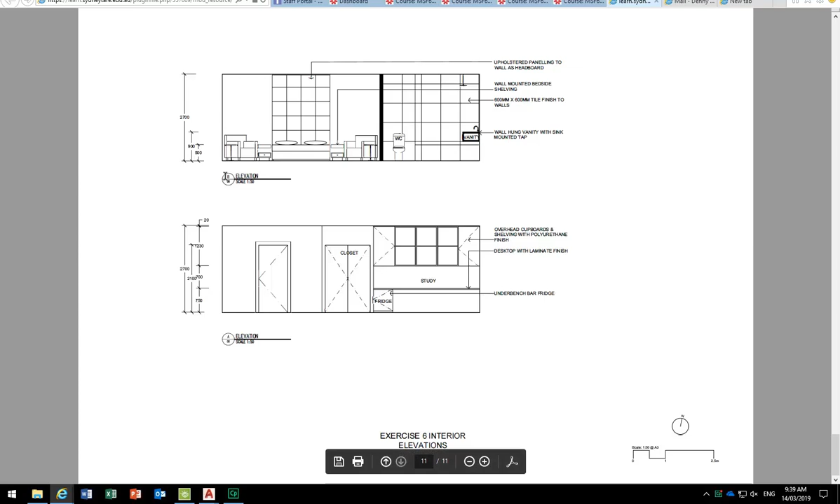Desk making noise, but anyhow, I'll start setting up my internal elevations now. I'm just bringing up a drawing of those, which I'm really not going to have to come back to, hopefully, because I can get most of the things I need as long as I know the height of the room.

And then maybe this 900, I think that's... I don't know what that's actually dimensioning, because it's obviously not dimensioning the chairs, so I don't really know if that's even useful. Maybe it's the vanity and it's just on the wrong side.

But I'm going to show you as well how you can get these heights by measuring afterwards, because you don't want to sit down and guess these measurements for all the different parts of the chairs. But actually, before I show you those steps, if you want to start working on those things, just print the drawing out and scale off to get the heights, and that'll be good enough, because if you don't have a perfect measurement for the top of your chair—the height from the floor to the top—it doesn't really matter, because you're not designing the chair.

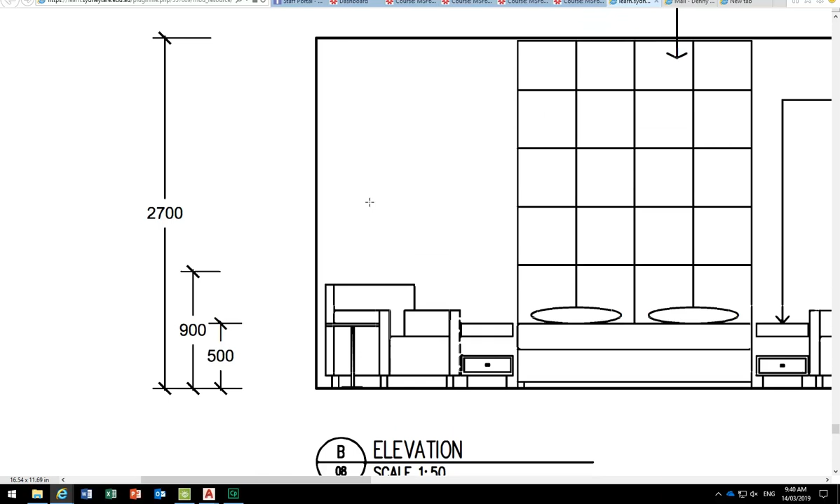It's going to be supplied as-is from the furniture makers, so if the height isn't perfect, that's not such a problem. But what we need accurate measurements for are the things you're designing, and that's going to be the height of the room, and things like vanities and other things that you're creating and designing as part of your fit out. So I'll start with those.

So again, looking at this floor plan, I'll just quickly go back and double check that height. It was 2700, wasn't it? Yeah, okay. So we want to project to the left, but I don't want to be drawing that way.

So I'm going to rotate the whole view, or the workspace, using this icon that comes up only when you move your cursor over that view cube in the compass. Once you move your cursor there, you're going to get these curved buttons. And actually, I always forget—do you want me to take your screen over so you can see this close up? Yep, so I'll do that.

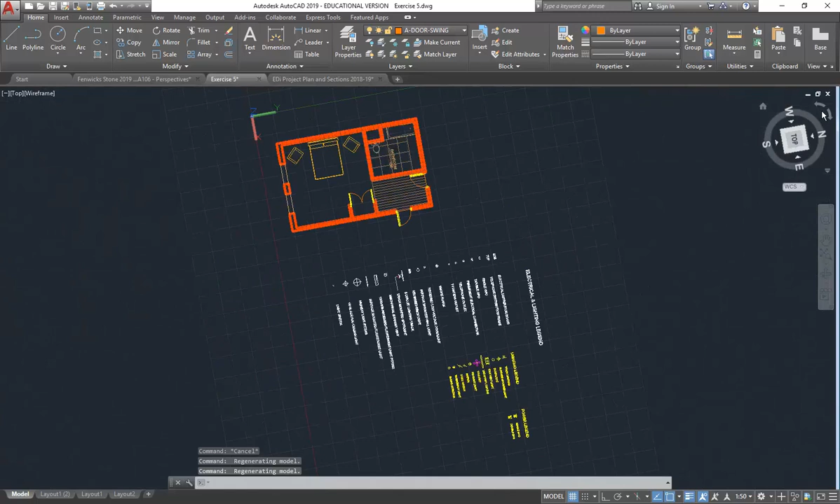Okay, so it's an easy one to miss, because it's not there until you move your cursor into that spot. But once you do, you're going to see those curving arrow buttons. I always think these are back to front, which is why I'll often do it the wrong way. But in this case, it should be the bottom right arrow that I'm picking to rotate it that way—I suppose it is the right way, maybe I'm just thinking of it wrong. Yeah, so you can see there you can easily rotate it back and forth. And so this is the way we want it.

Then I'm going to draw a line so I know where I'm projecting. If you look at that internal elevation, you can tell it's obviously cutting through the bathroom, and probably not cutting through the windows, though it's hard to tell with an internal elevation—but we'll assume it's not cutting through the windows. It's also probably in front of the bed, but it doesn't matter if we draw the line through the bed; we can just draw the bed as though it's not being cut.

Okay, so I'm going to draw a line, and I might just change to one of my layers—I don't have an annotation layer, so I'm going to make one, just a general one for now, and set it to be white. For some of the annotation I've been using 0.25, which is good for text, but otherwise annotation 0.18. And I'll make that the current layer.

Then I'm going to draw my line so I know where I'm projecting and where I'm cutting through my space. Again, not through the windows, so I'm going to go on that bit of wall between the windows. You can do it on the midpoint or even just to one side, it doesn't really matter.

And there I'm trying to get under the bed. I'm going to turn ortho on so it's a straight line, and I'm going through the bathroom, of course, and then I'll be cutting the vanity and again that wall next to the bathroom.

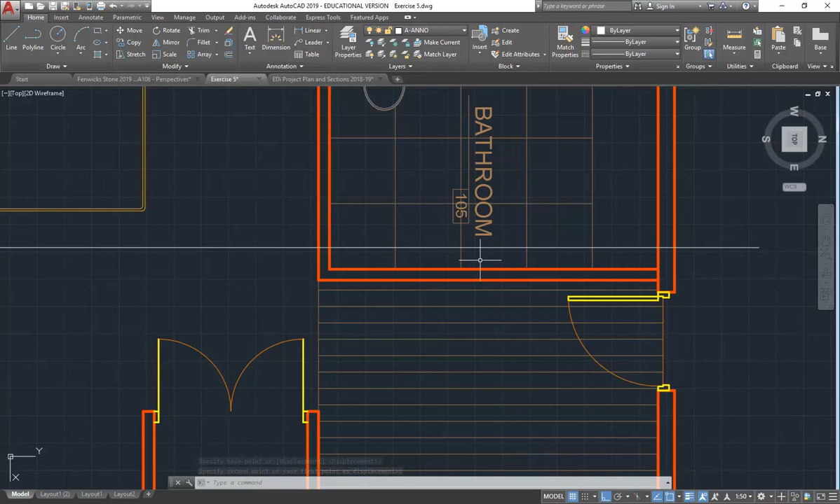Maybe it could be a little bit lower than that, but you don't want to have it too far down below the bathroom wall, and that should do. So I've still got to finish off some things in the plan—the bathroom and the door's got to be added—but I've got enough to draw that section, or the elevation.

So now we've got to get some more layers. I've got a floor layer, and I'll just show you that that floor layer has actually got a very light line weight, because that's been used not really to draw the floor as such, but to show the floor hatching or the floor material.

At this point, you'll often need to break your layers up further, and you might even need to add things to your layer names. So I'm going to change this to A-floor hatch, because now I'm going to make a new layer for the floor, and I'm going to call this one A-floor. Just keeping it consistent, with a dash.

Colours are up to you, but I'm going to make it maybe a green sort of colour because it probably would be concrete. Even though the floor lining on top obviously wouldn't be concrete, the floor structure would be concrete. And then I'm going to set the line weight.

Well, I'll check with you—what do you think the line weight should be if it's the floor being cut in the section? Thick, that's right, as thick as you can really. So this is going to be the heaviest line weight. Since I've used 0.5, which is quite heavy for my walls, I'll go with that for the floors as well.

And that's always good for internal elevations. It's really important that you have heavy lines—I mean this is just okay, but I think these drawings can definitely be improved by having a heavier line around the outside, and that makes them really read as true internal elevations when they've got that heavy line as a border.

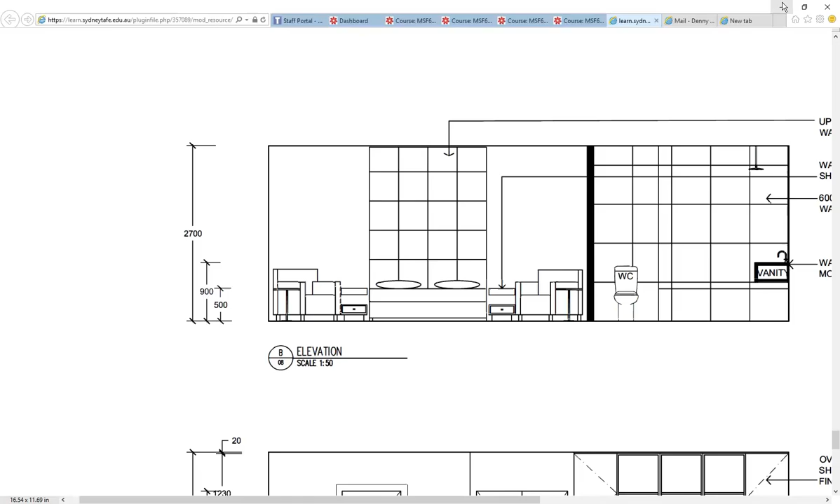So again, 0.5 is the line weight I'll use there, and then we'll also need some more layers for the walls. Oh no, sorry, I've got this layer already, A-wall projection. You'll see in a minute why we'll need that. So that's enough—I'll make my floor layer current.

Okay, so I've got to decide where my elevation's going to go. By drawing a line, I'm just going to start it somewhere up above my plan and take it across to the right. As long as it's a straight line, that's good enough for the floor. But leave a bit of distance from the plan—don't go too far, otherwise you're going to be creating work for yourself by having to zoom all the time. So again, that's up to you where you draw that line.

And so then I'll change to my—so I'll do a ceiling too, that's what I meant to do. So I'll make a layer now for my ceiling.

If it's not nominated, normally you can assume these are cut layers. But if you want to make it clear, you can always put that in the name. So you could say A floor cut.

And see the wall there. So I've got A wall projection. Then the other one is again cut, but again if it doesn't say, you can often assume that it's cut.

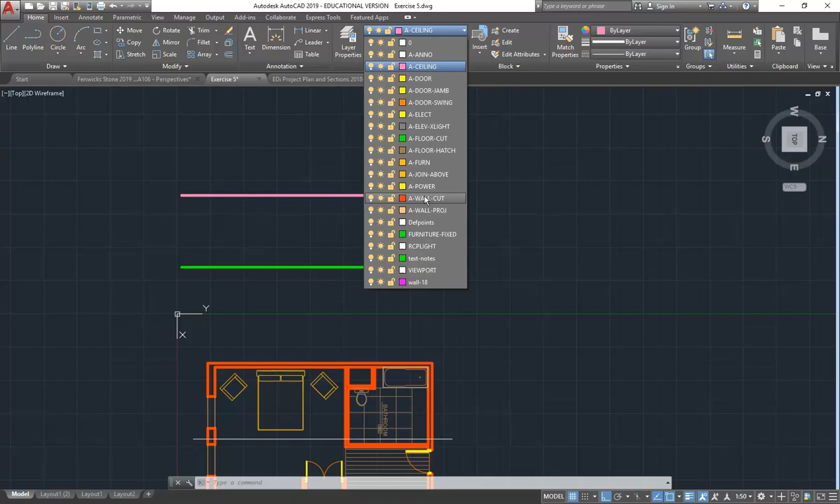So then I'll change to my wall layer, wall cut, and draw a line by projecting from the intersection of that section line I've drawn and the wall up to my ceiling, and the same on the other side.

That's the really simple ones - you see it, and then use fillet, making sure the radius is 0, and simply join those lines together. Easy. And I'll do the bottoms too.

So then I'll just draw a couple more lines for the interior walls. There's a good chance maybe just to point out a couple of commands. A lot of people like to show off that they know these commands and use them, but I don't actually find them that helpful, I'll show them anyway.

You've got these two other line drawing commands, ray and construction line. A ray gives you an infinite line, so from any point it'll just go forever until you trim it. And that can be useful.

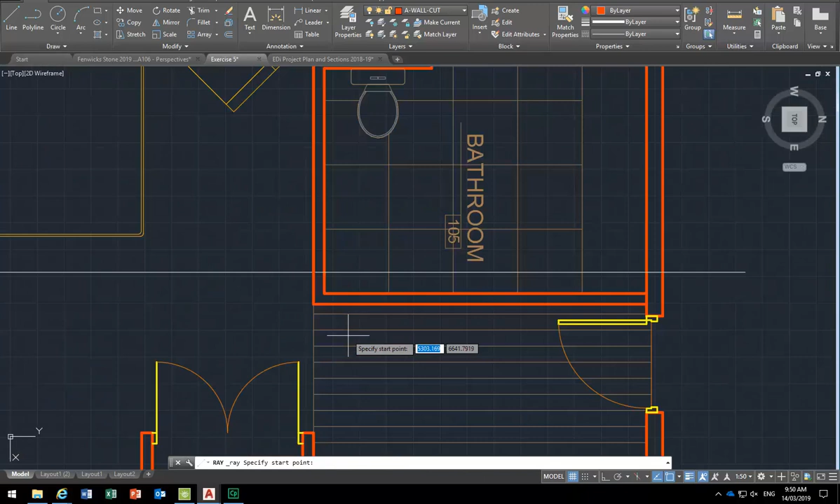So if you think about drawing from here, this is a ray, and it will just come up without me having to zoom out. If I can just have ortho on, that will go straight up to infinity, and then I can come back and trim that at the ceiling.

And once you trim a ray, then it becomes a line. So some people do that. And then the other one is construction line.

Yeah, that's right - so they go infinitely. Construction lines go infinitely in both directions. But again, when you trim them, they're lines.

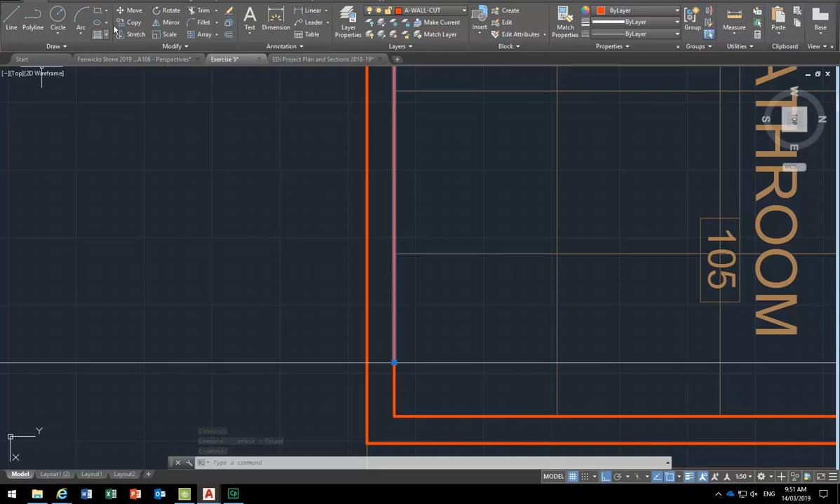It might seem like it will save you time, but what I've found over many years is that sometimes it's easier just to draw the one line, and then when you're zoomed in to all the parts where it's cutting your walls or whatever, you can just copy that line across to all the points that it's being cut.

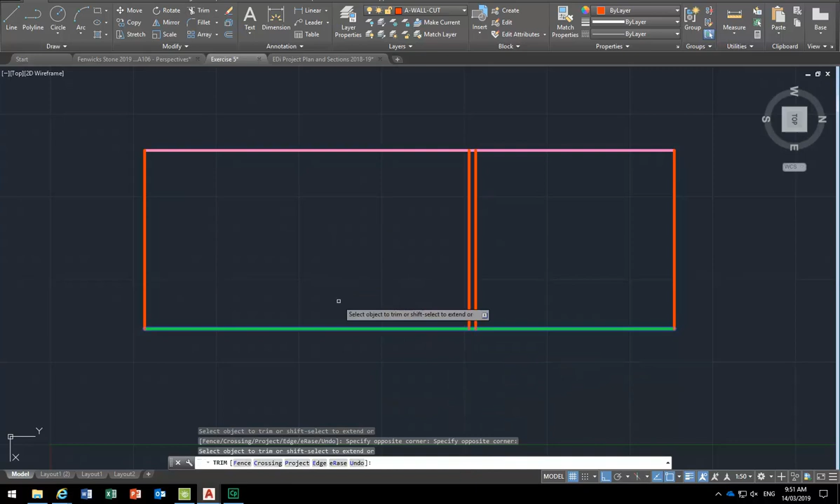So if you're doing that, you probably don't need to use rays. And you can see there, I've got the same thing and it's already trimmed. I find that to be the easiest way, and now I can just trim at the bottom. We've got the basics set out for the elevation already done.

So this is the next thing I'll show you - how to do some more detailed items, and these chairs are a pretty good example. I think you can probably all do that already, so I'll actually show you what I was going to do in the next video, but I'll just do it now because I think you'll all cope with it.

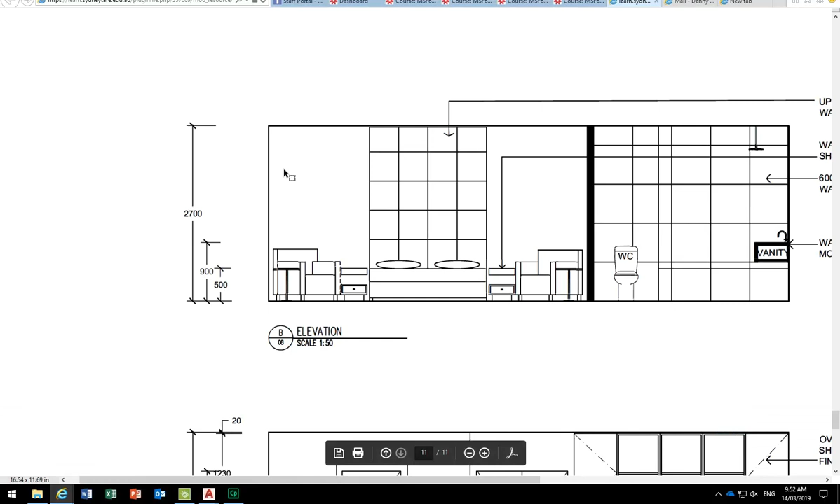How do we get the measurements for things like this chair? As I mentioned before, you can just print it out and scale off with your scale ruler. That's a really important technique - you've got to be comfortable doing that. It's something you'll need to do all the time. So that's one thing you could try.

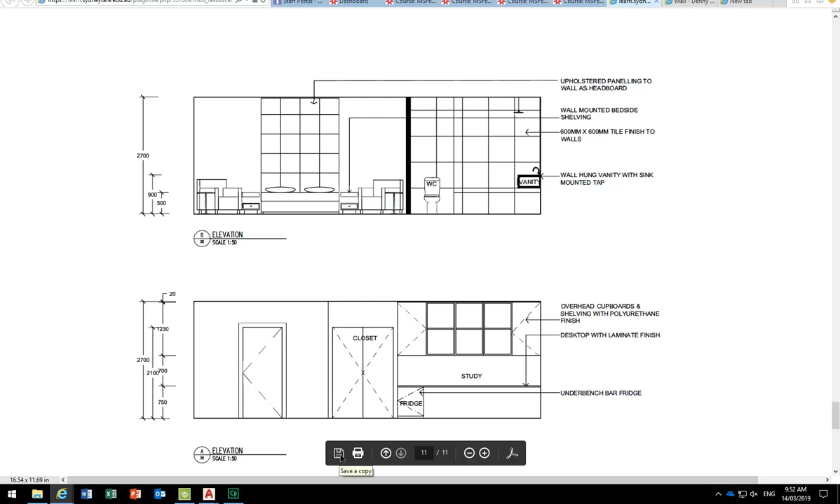But I'm going to show you something that's similar. So I'm just going to make sure I've got a copy of this, and I'm going to save it just so I can get to it quickly.

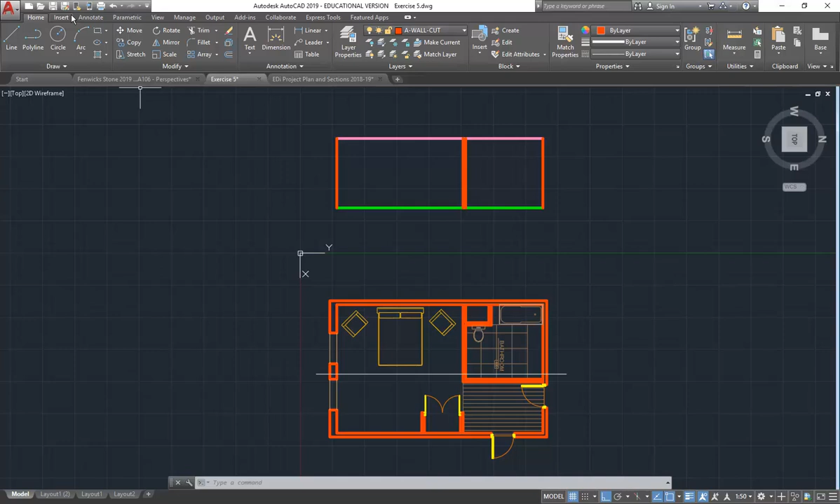Okay, so I'm going to now go and insert. Which page was it? Page 11. Okay, so I'm going to go onto the Insert tab in AutoCAD and then Attach, and then make sure, before I choose anything, down the bottom it's got to say PDF.

But apart from that, this is a brilliant thing in AutoCAD, because not many programs will let you insert PDFs. It's a proprietary thing. Adobe are really precious about their PDF format, and they don't give the rights to use it out to a lot of companies. So many programs don't have the option of inserting PDFs, but AutoCAD does.

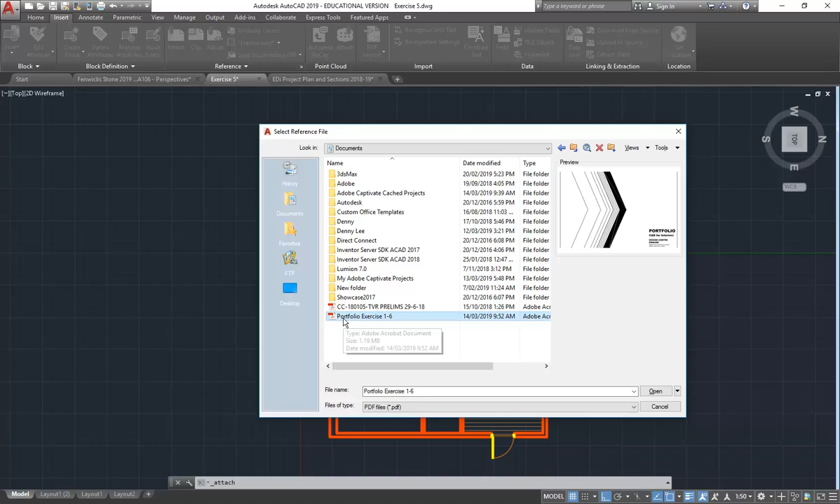So I can insert that file, that's the one I've just downloaded. And then just choose the page I want, page 11. Click OK.

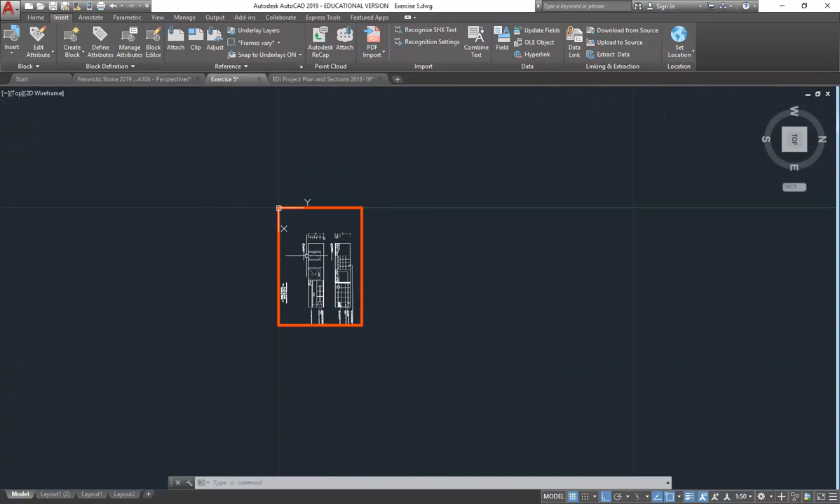And where's it gone? Oh yeah, now it's rotated, and it's also going to be tiny. Okay, but that's okay. We could have scaled it as it was being inserted, but I wanted to show you how to adjust it when you don't know the size, because you won't know what it is to begin with. So you can see there we've got a measurement.

Now also I'm going to rotate it so that it's at the same angle as what I'm drawing. So just using the regular rotate tool, I'll rotate it 90 degrees.

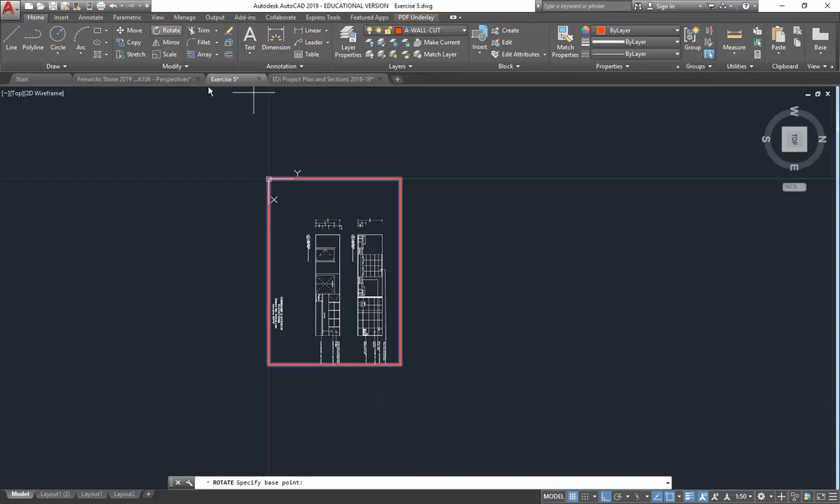But again, the key idea here is that you want to try and find a measurement and use that to scale the image to make it the right size in our AutoCAD file. If you don't have a dimension like this, you can always use a scale bar, that'll work perfectly too. Anything that has a measurement on it.

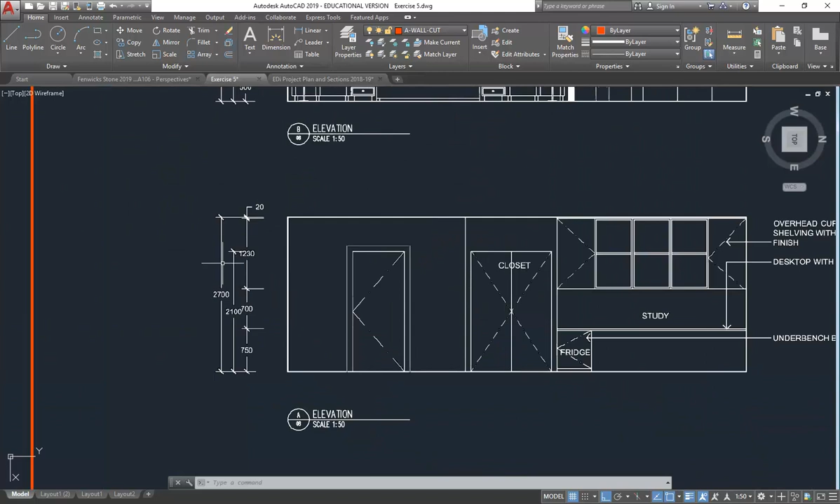So I'm going to click onto the edge of my image. It'll take us to this PDF tab. So I'm going to go back to the Home tab to get the scale command, and I'm going to choose a base point.

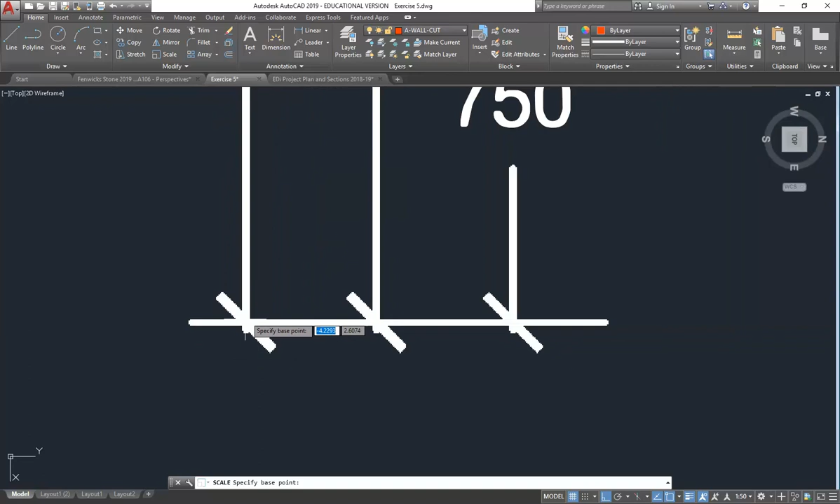So that's going to be at the bottom of that dimension. And I'm zooming right in just to be as accurate as possible. So there, notice I'm also going to the centre of the line.

And you probably all think that's normal because you probably weren't taught by the old architects and drafters that taught me how to draw by hand, and it used to always be to the side of the line in the old days. So watch out for that. I know it might seem pedantic, but it's a real thing. But if it's drawn with a computer, centre of the line is where you measure always.

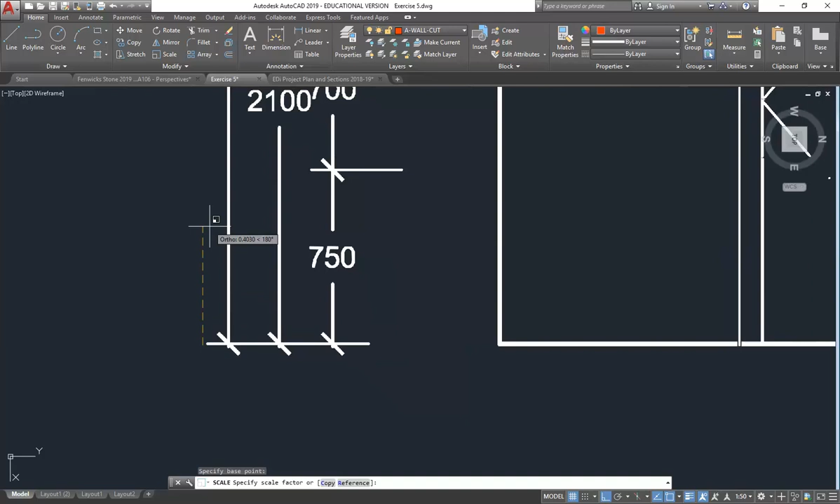So centre of the line, and then up to, then back on the command line. So that was my base point. So now I'm going to choose reference, and then get that same point.

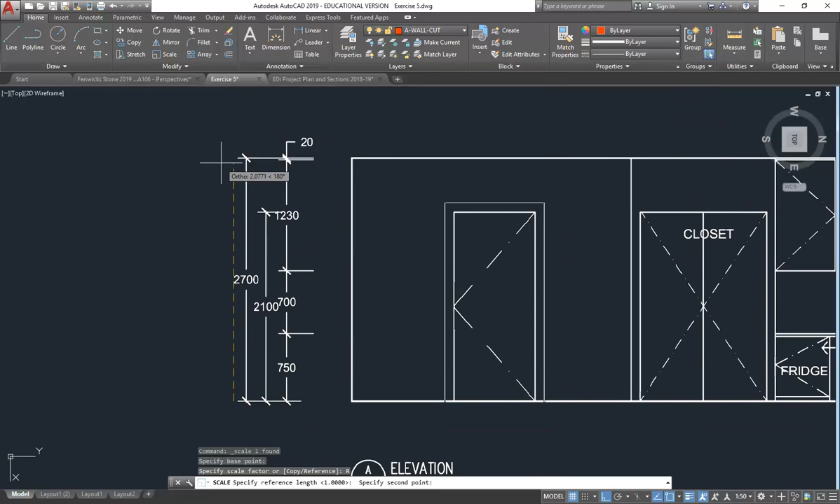Right, so that's where I'm starting to take my measurement. And it'll all make sense in a second, because then I'm going to zoom in and click onto the other end of that dimension. So I'm not worried about clicking exactly on it, I'm just making sure that I've lined up my endpoint with the centre of that dimension line, or it's called an extension line. So that's my 2 points.

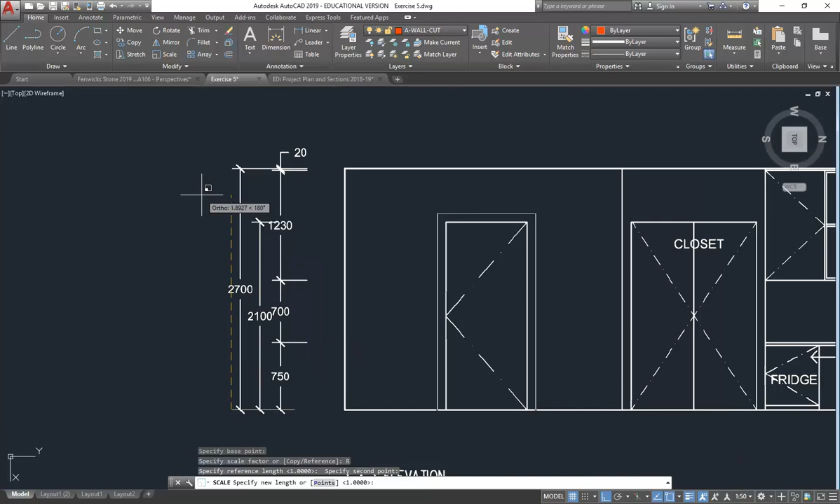And so then how big do we want those 2 points to be? Or how long do we want the distance between those 2 points to be? Exactly what it says there, that's spot on, that's good. So yeah, 2700.

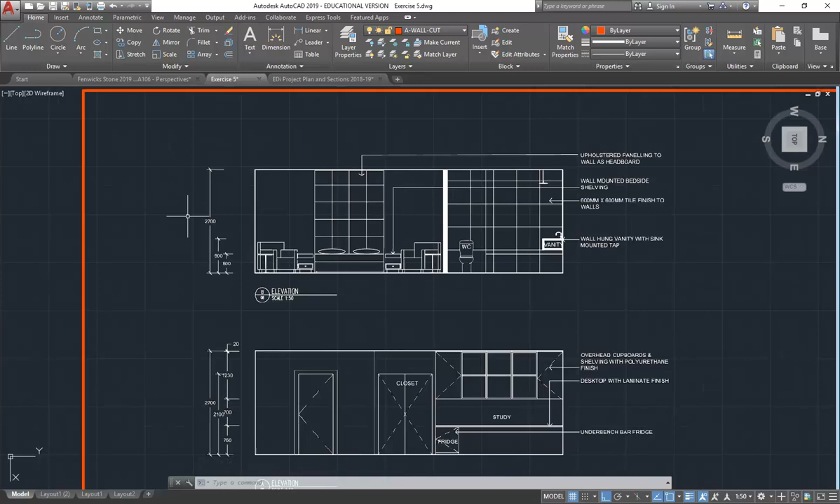So now it should be the right size. And I'm going to move that out of the way. And that's a really helpful technique, just to be able to measure something accurately in a program like this. But it's basically the same as if you printed it out and scaled off with a scale ruler. It's just that we get the chance to zoom in and really be accurate.

So I can now, to check it, use the measuring tool, the tape measure, and check that that dimension that I've just used is actually 2700. And there we go, 2689, that's close enough.

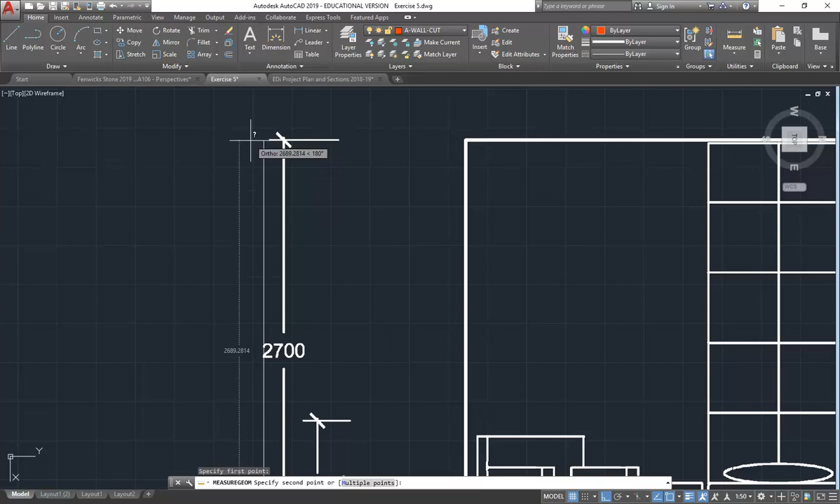10 mil, it's fine. So now I can take some measurements off this chair and show you how to start drawing that. So I'll measure to the top of the chair, and then to the floor is, what, 800.

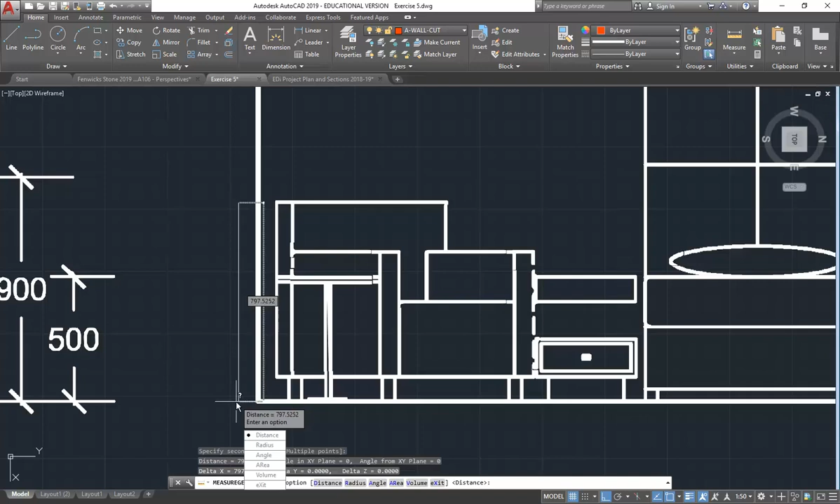So let's start with that, 800. Now coming over here, I should have a furniture layer. Yep, there we are. So I'm going to draw a line from the back of the backrest and take it up to my internal elevation. Then for the height, I'll offset that 800 from the floor line.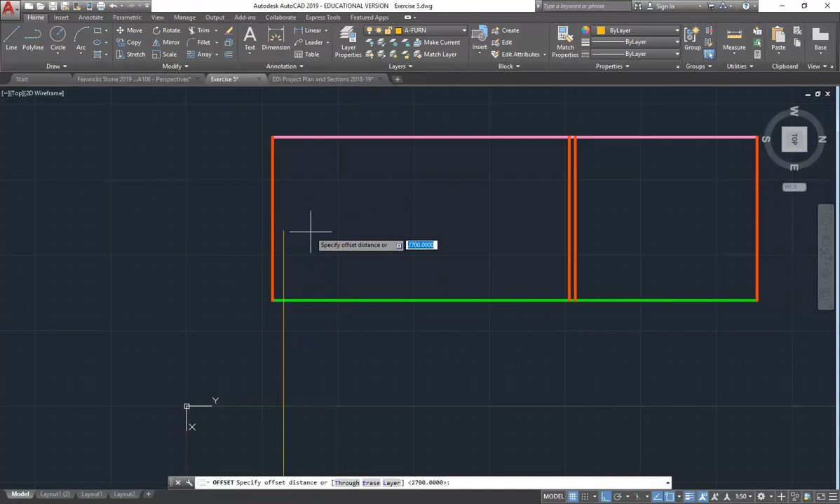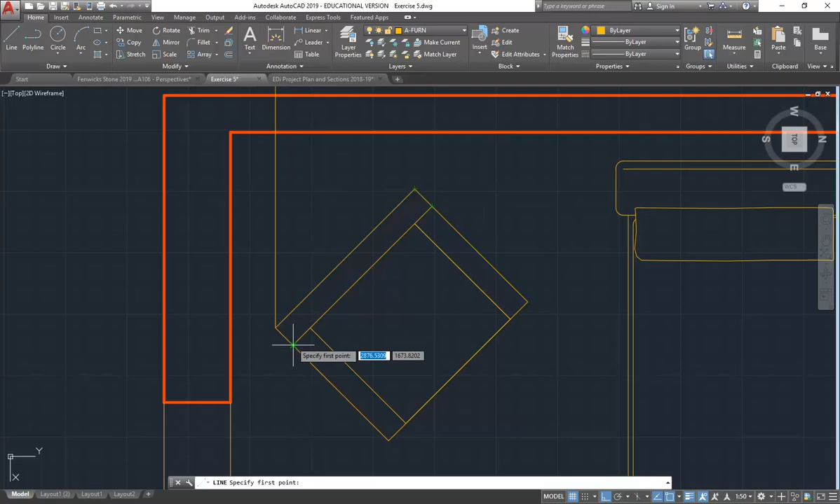So then I'll take that line back to make it clearer. Well, sorry, they're going to be joined, so I'll fillet to join those two together. Change that new line to my furniture layer, and keep projecting lines, so all of that backrest, those four corners, are all at the same 800 height, so I can project from all of those up to this new 800 line.

Now, if you think about what you'll see, you're not going to see this back corner, so I just need to project from the one on the right, taking it up here. So the back corner would be behind there. But it's a great thing: if you're having trouble visualising things and imagining how a section would look just by thinking about it, drawing it using this method will make your brain start to tell you how it's going to look. So I'm going to fillet these together now. You can already tell that's what a box that's rotated would look like in section.

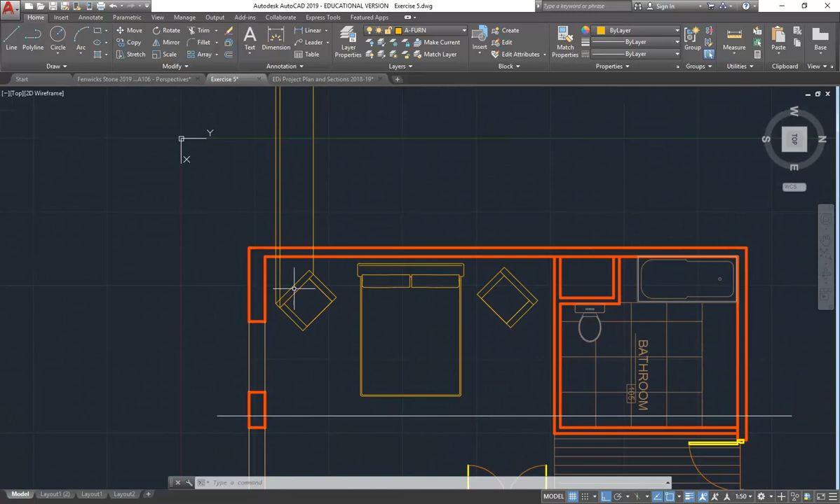So then the arms, we can do the same way. Come over here, again just taking a measurement. So the arms are, what, about 600? Yep, 600. Okay, so again, offsetting from the floor, 600.

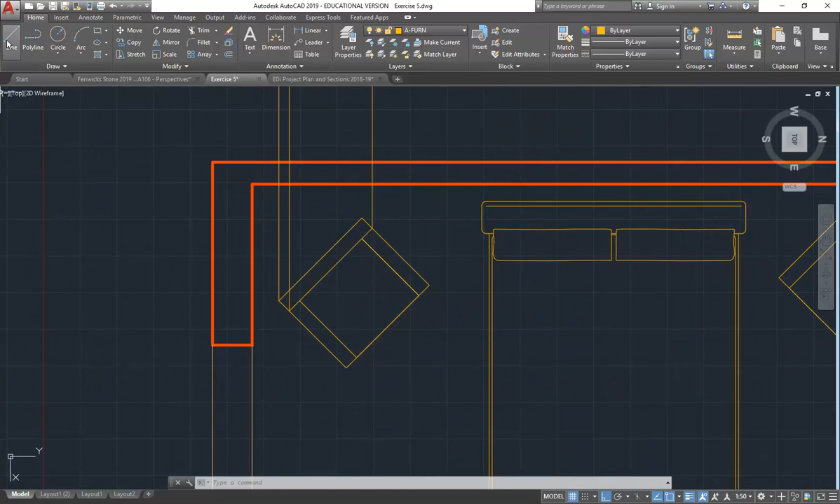Change the line straight away to the furniture layer. When you're doing drawings like this - and this is really how I learnt to draw, doing drawings exactly like this in 2D in AutoCAD back in 1991 or something, for some office fit outs I had to do - I had to work it out on the job myself, and I just started projecting off all these detailed bits of joinery and things I was designing, and that told me how it would look in elevation. I didn't know until I started drawing it. It was my first time, and it was, I think, a brilliant thing to be able to see all these things rotated in different angles as they would look in real life.

So again, projecting off the corners of the arms here. Right, so the real tip I was going to give you is tidy it up as you're drawing. I'm going to fillet now to join these lines together so I can see clearly that's the arm coming off and stopping there. If you've got lines going everywhere and you're not sure what they represent, it gets pretty confusing and you don't know what you're looking at. So tidy it up as you go and it'll make it much easier for you.

So I've just drawn a line up there, roughly to the height I want. But now, of course, that's for the arm, so I'm going to draw a new line from my previous arm across to connect to that new line, fillet those together right away to make it clear and neat, and take this one across to where the arm - well, it's not quite there, it'll come back, but you'll see in a minute. I'll fix that up.

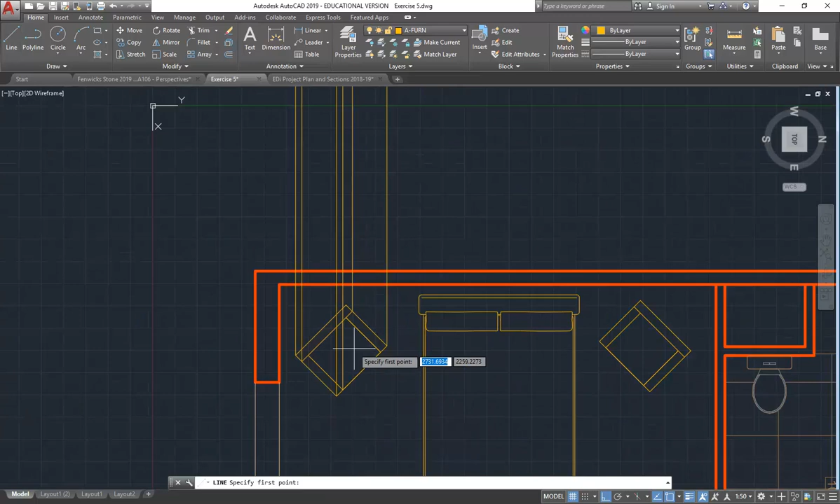So then if you think about where the arm comes to the back of that backrest, well again, you can just get it by projecting a line from that corner up to here. So that's where I should bring that across. And that tells us that this part of the backrest stops at the arm.

So, which one did you just do then? Fillet. Oh, and it folds over. Yeah, fillet without a radius just joins things at a corner like that. Yeah, I mean you could use trim, but fillet's easier if you're just joining two things. Yeah.

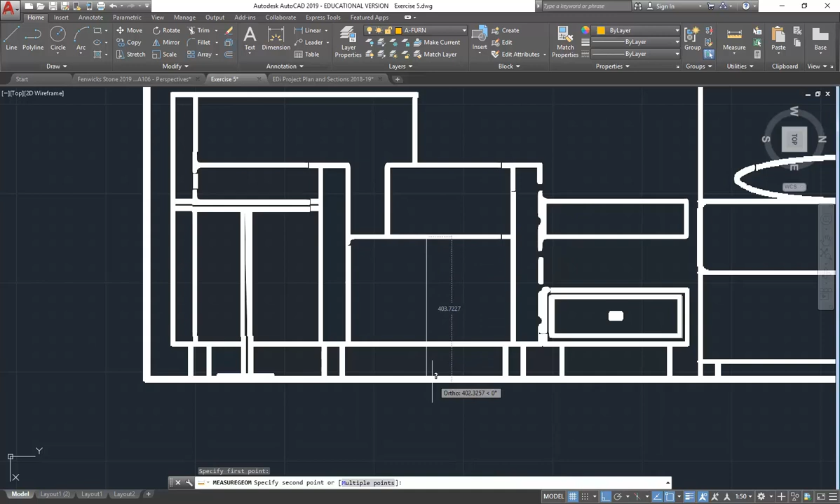So then to do the front of the arm, that's the last bit of the arm. Again, just projecting up to there. So again, if you keep tidying it up, it becomes much clearer what you're looking at. And then coming over to here, so we've got the legs - oh, I'll do the seat first. So the seat is what? About 400. 400.

So again, offset from the floor line. Trim, this time I'll use, and of course the seat is going to be trimmed between the two arms, so here and here.

Now that looks different... oh no, that must be right. This looks different to what's in the other one, but no, it's right. So again, to make it clearer, I'll put that onto the right layer and then keep trimming away. That's the really important tip. So when I trim with that seat and take away the arm, because of course the arm stops or is hidden by the seat, it starts to all become a lot clearer.

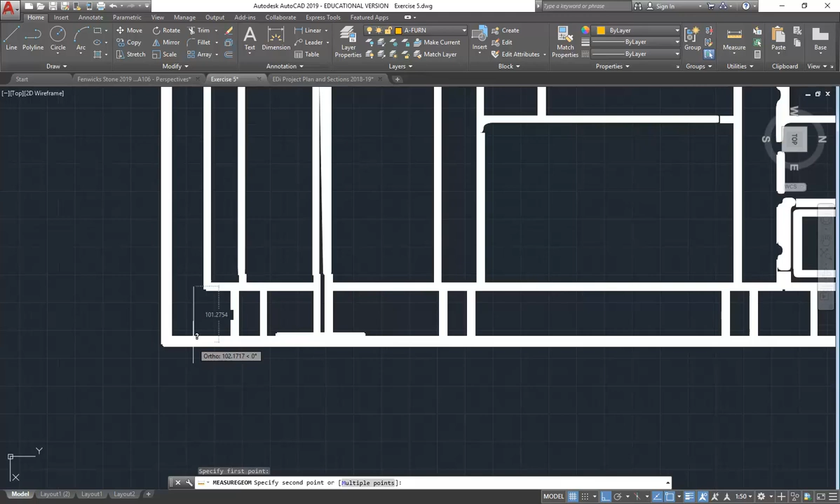And then coming back, so then the bottom of that seat and where the legs are, that is about 100, I'd say, but yeah, 100. Okay, so I'm going to again offset 100.

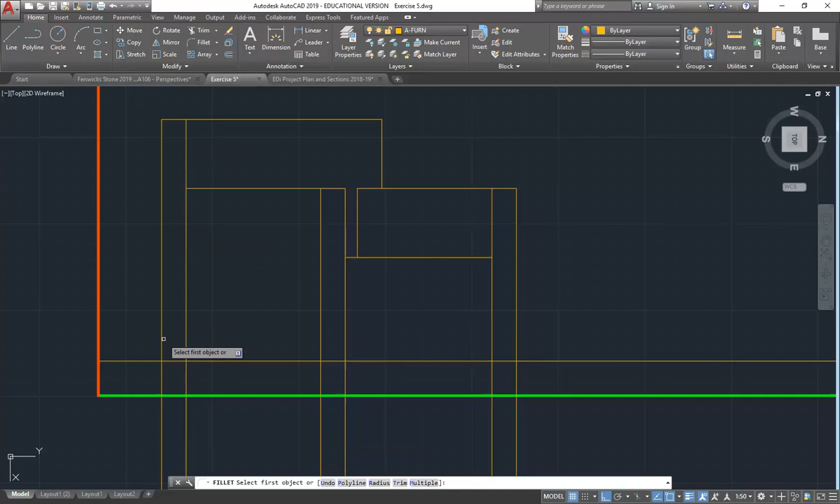And then now I can do a lot of tidying up. So coming back to furniture, I'll use fillet to get the back because I can, and then the front or the side on the right, and then trim now with this line as my cutting edge and take away the rest. So that's looking like a chair now. That's an ugly chair, but it's a chair.

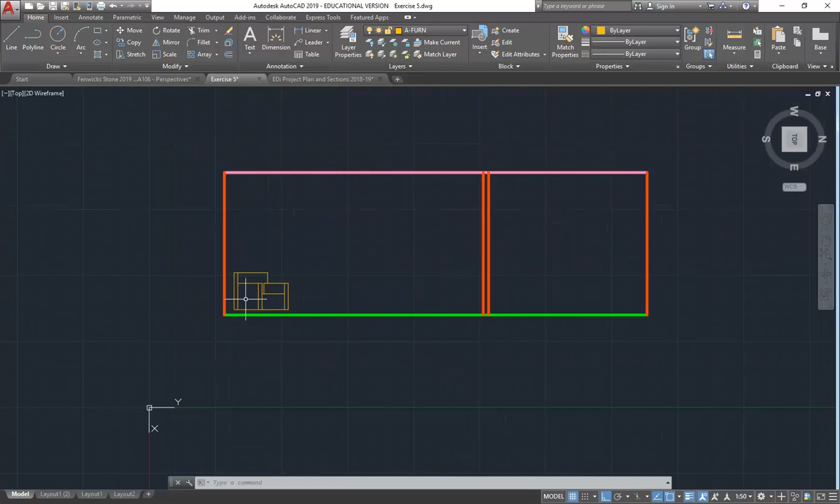And I guess it takes some practice because you don't have each thing beside each other. You've got to move the screen. I'm just saying, I'll get lost on my way. Yeah, but just keep projecting. Reference down here on paper, maybe that's— yeah, well, print it out as well. Yeah, that's tricky, yeah.

Takes a bit of practice, but once you get it, then you can use that for every drawing you'll ever do.

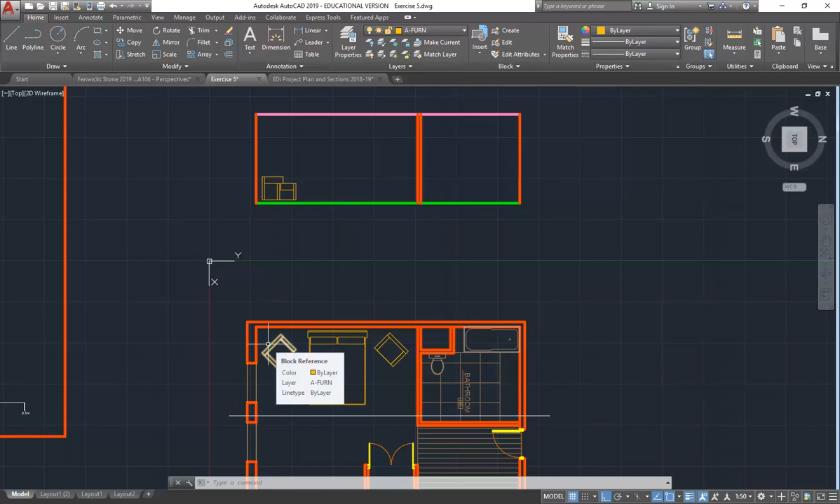But there's still one more thing. Okay, so all of these things that I've drawn in the elevation there for the table, all of this part of the chair we could see in plan. But which part that you can see there in the chair can't you see in plan? Yeah, well, the legs, yeah. Right, so the legs are hidden in the plan. We can't see those. But we need to know where the legs are to be able to draw them here.

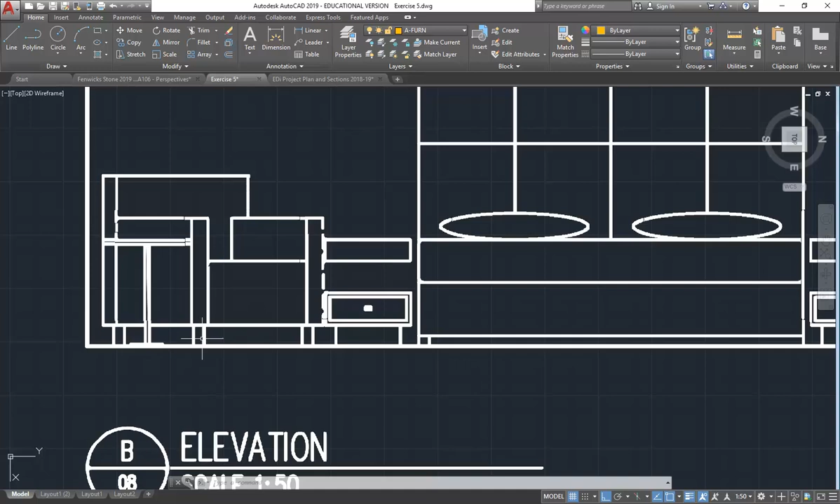So what you have to do is just... no, it's just because they're hidden. So the legs are under the chair. So we can't see them in the plan. But we need to know where they are in plan. Now, you don't need to do this too precisely.

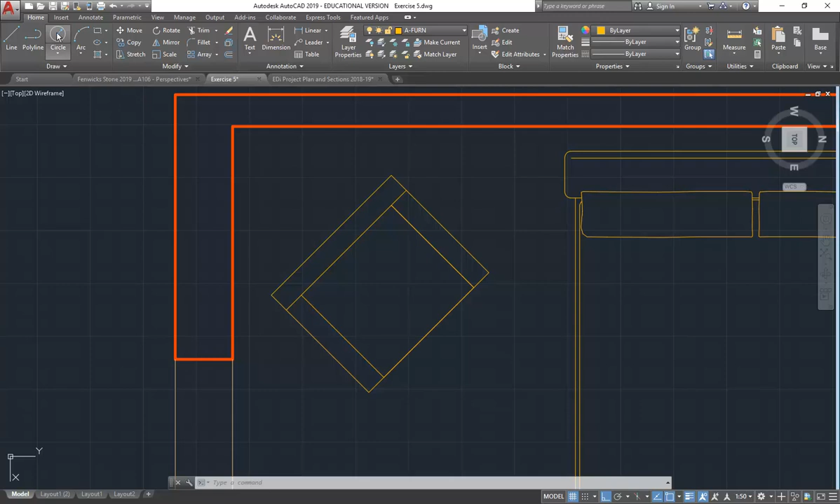And it's a good chance to try it, some furniture design. Just draw a circle. And I always love this because when I made furniture for a living, I was doing the legs quite often, and I'd be turning these beautiful bits of wood to make these legs for things like this. And so I always liked doing this stuff. And so that's about where the leg would be. Just draw one, and again, just position it roughly. It's up to you really, as long as it's a bit under the arm and a bit under the base.

That's probably okay. And then use mirror, maybe. But it's up to you how you copy it. I'll use mirror and go to the midpoint at the front, the midpoint at the back, and it's copied to the other side. And then, my cursor's moving by itself.

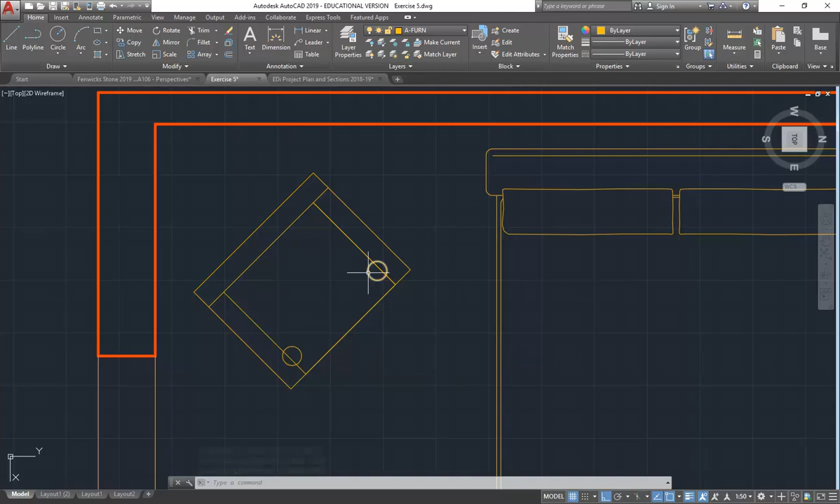Okay, so now I'll select those two circles, and again use mirror, and this time get the midpoint on the arm, and then go to the opposite arm. I'll turn ortho off so you can see it. That's cool, I didn't realise you could choose two things. Oh yeah, yeah, you can mirror it, as many as you want, yeah.

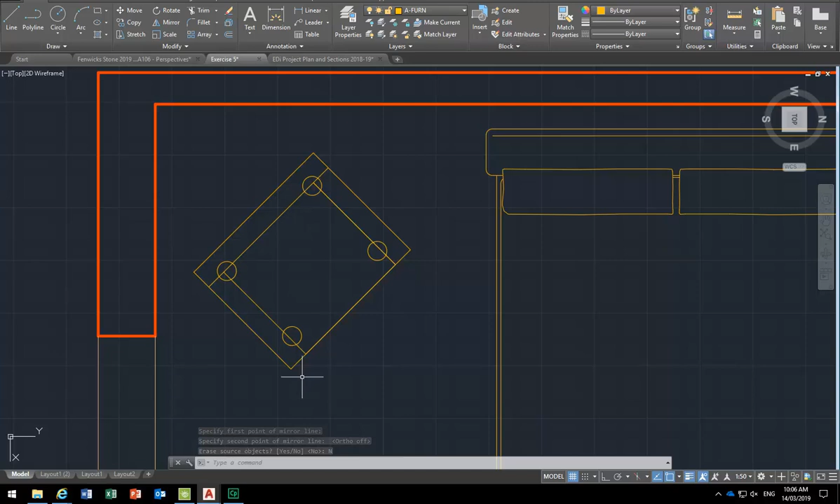So now I know where the legs are. They're probably a bit big actually, not a problem. I can select all of those circles now. Right click and go to properties, and then change them all as a group to have a different radius. Maybe 30 is better. So that's a nice thing to know. You can use properties anytime, just right click, and as long as something is selected, you can always show the properties for it, and there's a lot of things you can change in there.

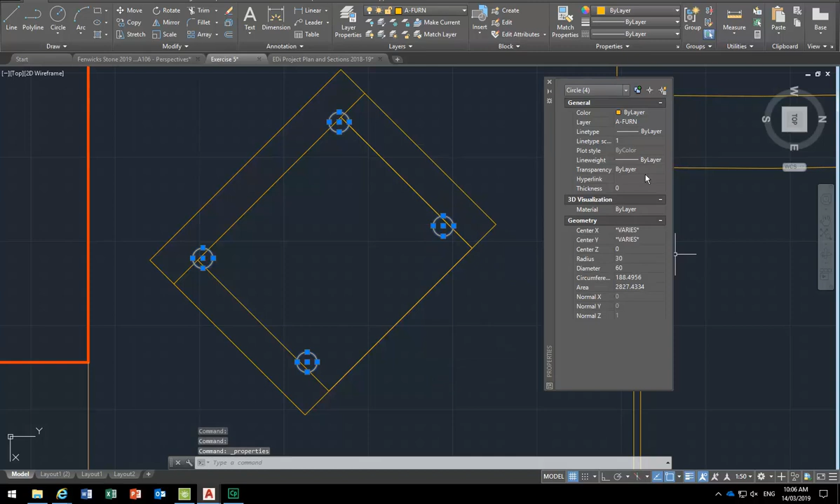So I've got my circles. Now I can draw lines from the side. For this you need to make sure you've got the quadrant snap turned on.

Because they're not visible, wouldn't they be like in a dashed line? Oh no, I'm going to delete them, I'm not going to have them in the plan. I mean, this is just a temporary thing. Yeah, exactly, that's right. But yeah, you're thinking the right way.

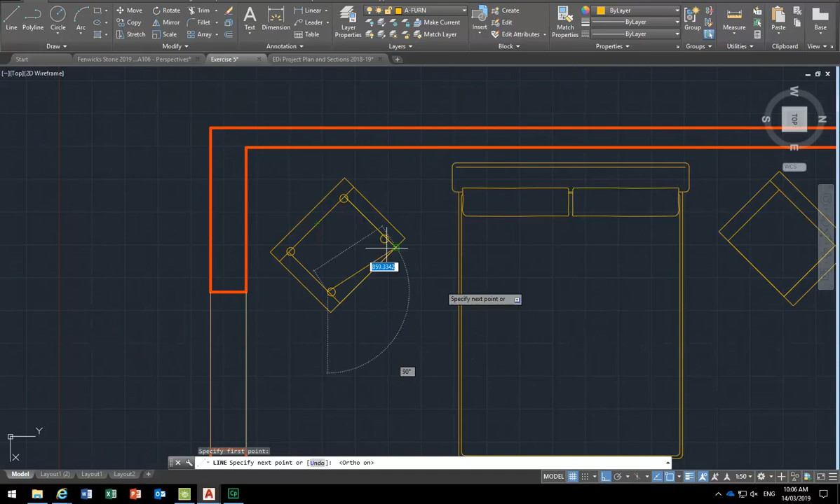So now I'll just draw up to the bottom of my chair, and I can keep drawing lines or copy that line onto each side of those circles. I'll turn ortho off so that you can see I'm just snapping to each quadrant on all of them.

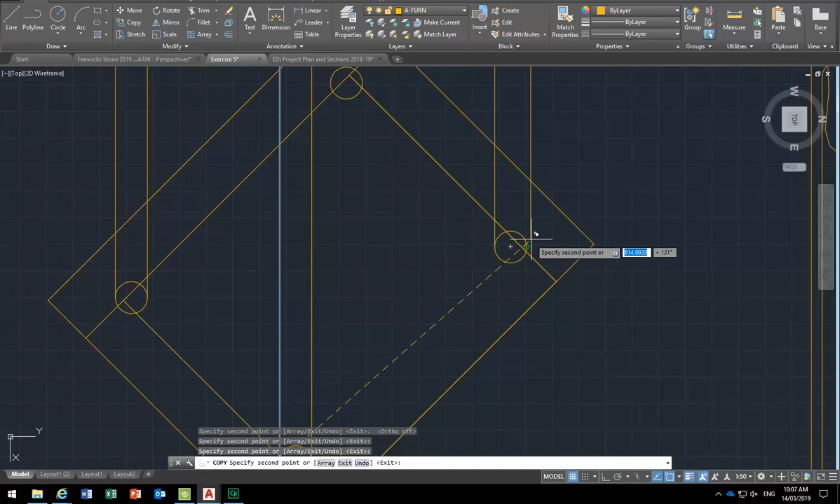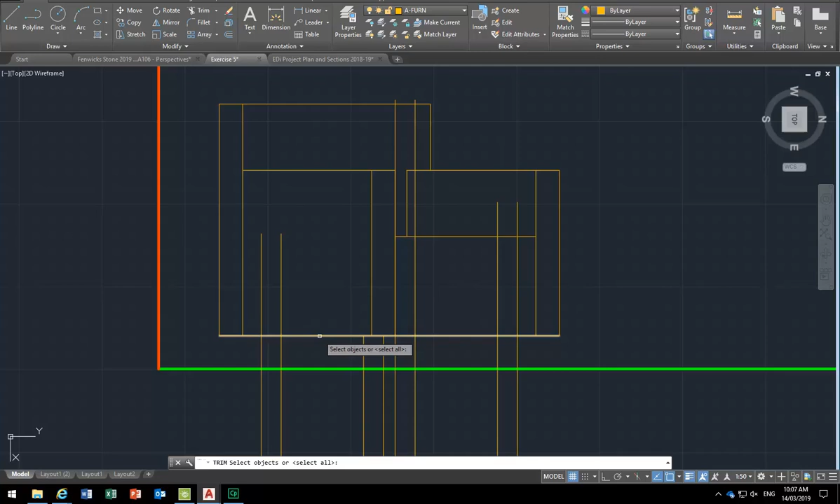There we go. And then again, when you're using trim here, this is where it'll help you to select cutting edges. Because if I just let it trim to all of these things, I've got to pick a lot more things to cut. But if I choose the base of the chair and the floor as my cutting edges, press enter, in one step I can just trim all of those lines back. And there we are, that's the finished chair.

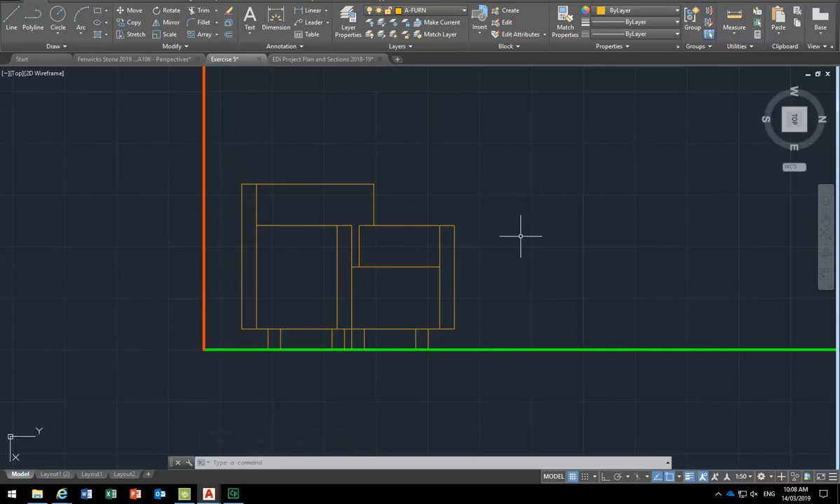Yeah, do you want another one? No, look, you can always look in the video, but yeah, you can use that approach for everything you'll ever do in elevation. It's the same technique for everything.

Don't worry about drawing the toilet too perfectly because you've got a block for that. You don't have to draw that one in elevation. So maybe I'll just show you where that is to finish off.

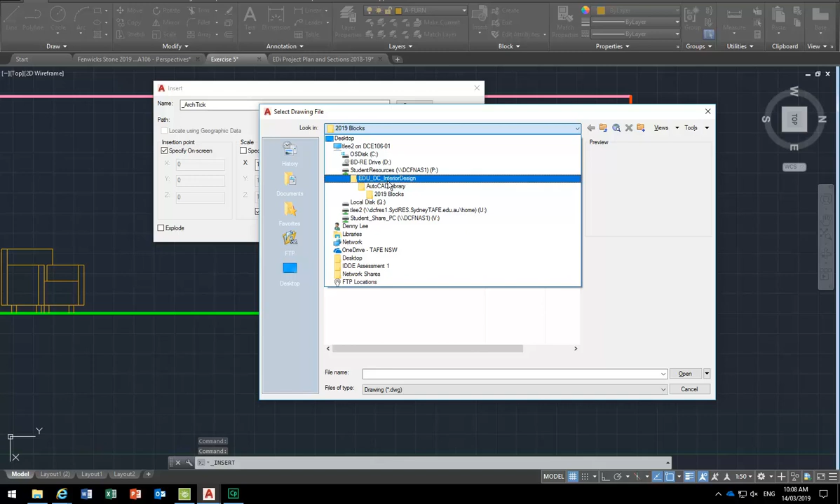The blocks, this is a new one. So if you want to get some of the new symbols, I've made a new folder called 2019 blocks with some of the new things I've been doing. But oh yeah, and there I've put... oh, they're not the ones, sorry, there's some other things there, that's for a different class. So yours, yeah, they're still in.

Have you been getting them from here? You haven't, have you? You've been getting them from... oh yes you have, yeah that's right. Blocks, sorry, and then the elevation.

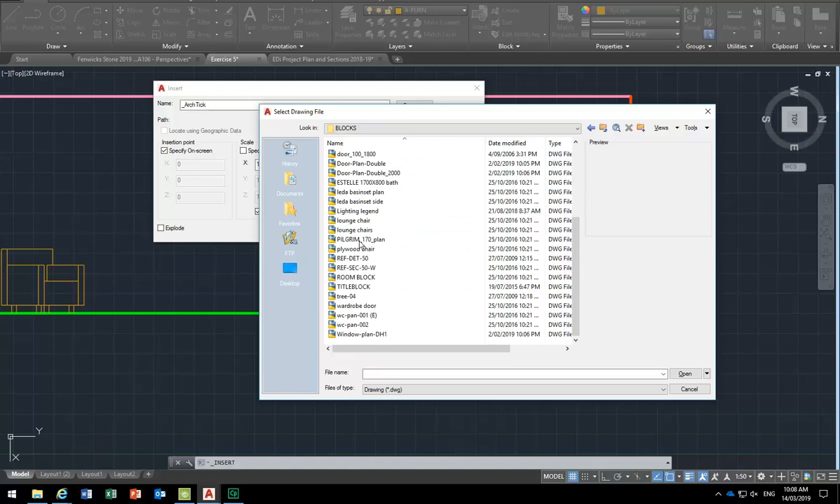There we are. There's nothing worse than drawing a toilet in elevation, it's painful, and you do all that hard work, and then you realise that Caroma have done that for you, and all the other toilet makers. Exactly, yeah, Caroma, Kohler, Reece.

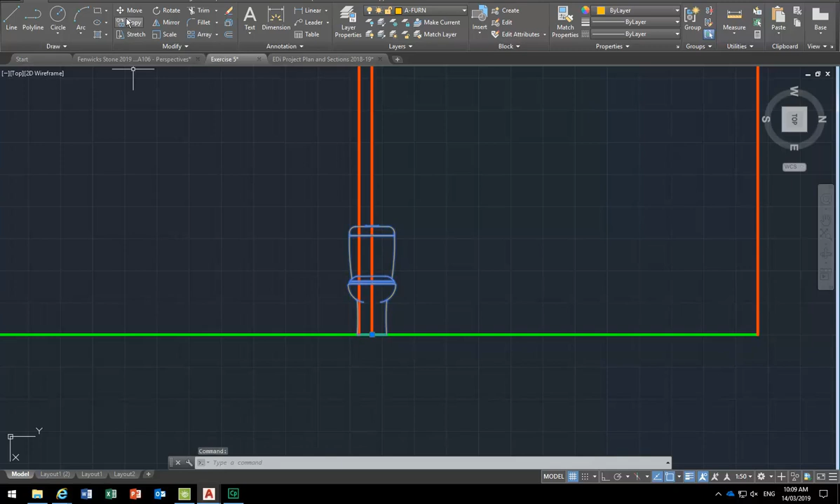So I've gone through the pain of drawing these things in section and then realised that there was a much better one already there that I could have just downloaded. So things like that. Can I do that again, insert? So can I download it and then actually trace it on quickly? Of course, yeah, of course, yeah.

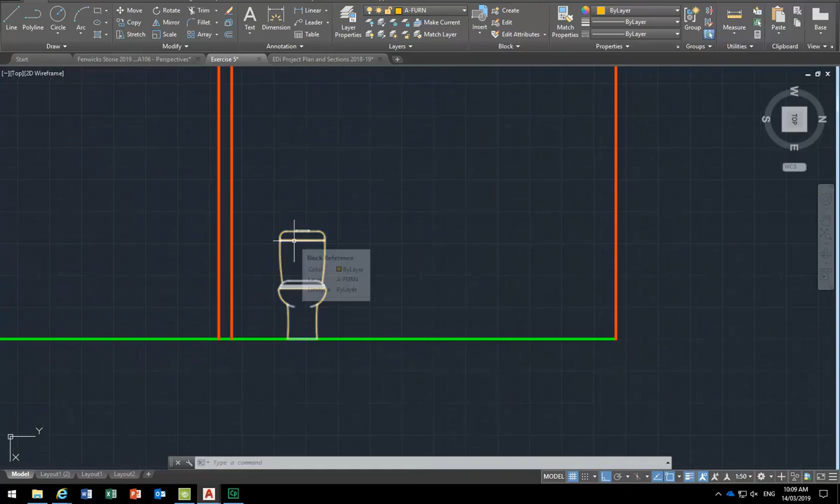And you can just explode these as well. So that's obviously a block in AutoCAD, so if you want to change it slightly, you can just explode it and then delete lines or whatever you want to do.

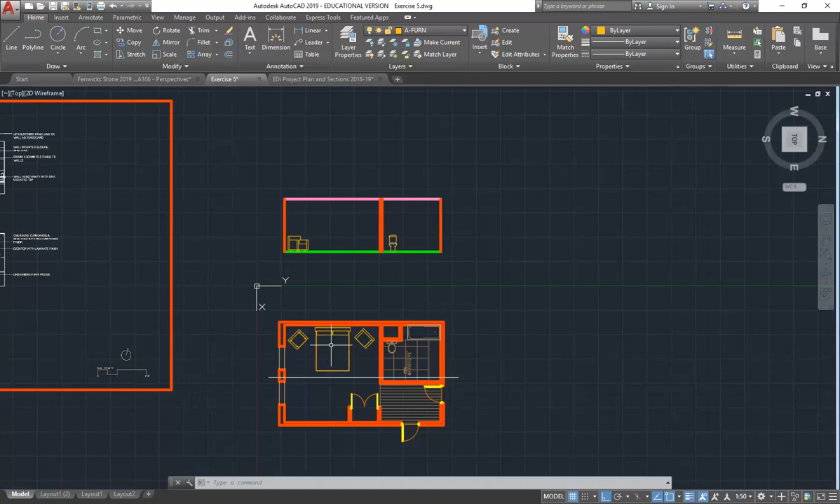Okay, so hopefully that should give you a pretty good idea about projecting, and you can do that for all of those bits of furniture as well as the main walls. The walls shouldn't be very hard.

And that's really the last major thing for this one. A lot of furniture places have their AutoCAD drawing.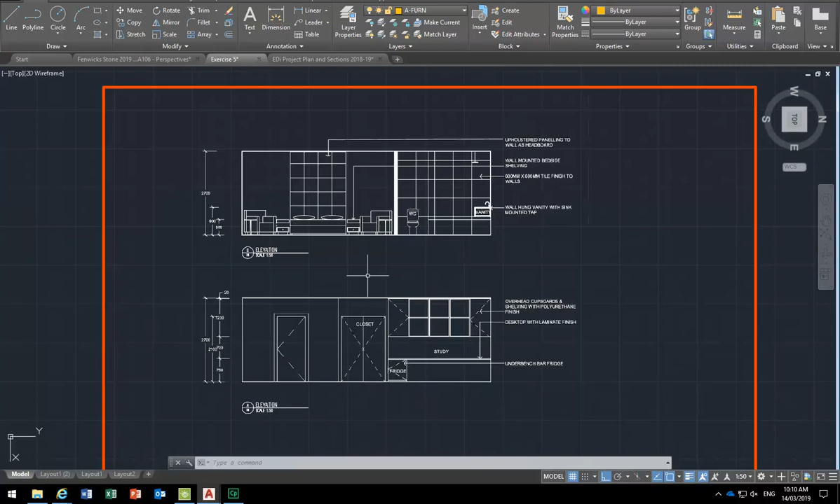Yeah, does that mean when we use Revit, it will read into it as well? Yeah look, for Revit, you can bring any AutoCAD file into Revit. But you've got to remember the two programs work really differently because AutoCAD's mostly 2D. Even though it's got all the 3D stuff, I keep trying to remind people of that, but most people are just using it for 2D drawing. Whereas Revit is mostly 3D. So when you bring your AutoCAD things into Revit, they're going to be flat, and then you've got to model off and project still to get your 3D model. But you can definitely use that as a base, yeah absolutely, yep.

So that's really good. Yep, so you're going really well. I think if you're taking all of that in, you are. If you're taking that in at this stage, that's good because, again, it doesn't always go this quickly. So that's great.

So unless you've got any other questions, I'll finish there and give you some time to try it all.